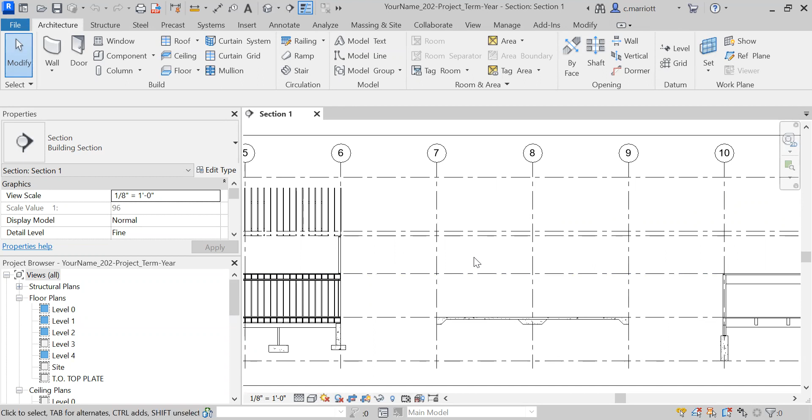In this video, we're going to be working on the third structure, the one that is between column lines 7 and 9. We have here a slab on grade, and the structure that we're going to be adding to the top of this slab is going to be made out of light gauge metal framing. So many of the concepts are the same as with the wood frame construction, but there are some really important and key differences in the two types of construction. So we'll be talking about that as we begin to build this structure.

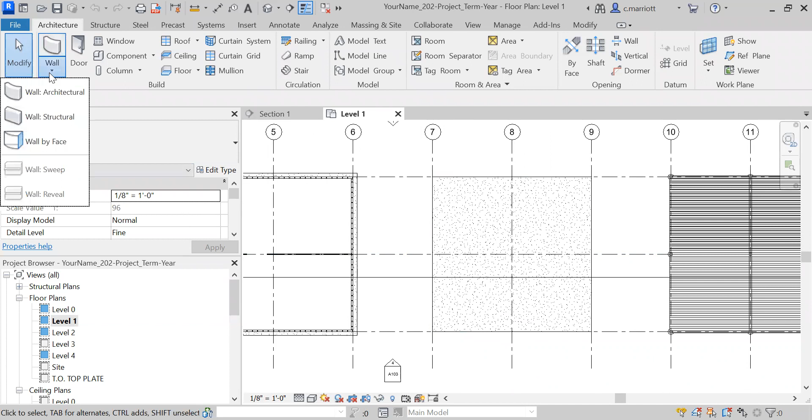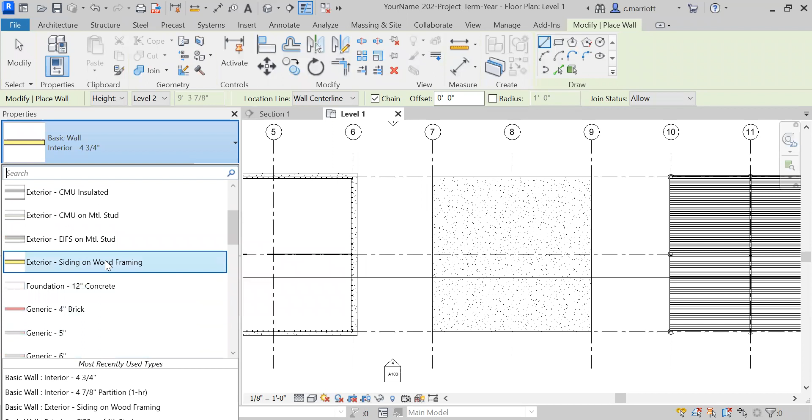Okay, to start off with, we'll be going to level 1 to begin adding some walls. We'll add the walls on all 4 sides here. And what I'm going to do is go to Architecture, to the Wall, pull down here, and I'm going to look for a possible wall to use as a basis for this one. So just scrolling up and looking what I have: brick, CMU, EIFS, siding on wood framing. We're going to be making lots of changes to this. I'm just going to go ahead and select this basic one here for siding on wood framing.

And then I'm going to click on Edit Type. And I'm going to duplicate it. And this one will be called siding on metal framing. And I'm going to click on OK. Then I'm going to click on the Edit button here, and I'll begin adding some components to this wall assembly.

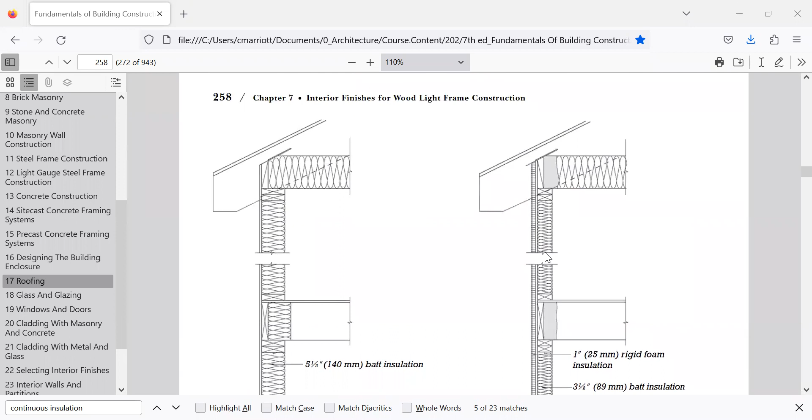Now, going to your textbook, this is the chapter that's on wood light frame construction. So as you know, we're doing this one out of light gauge metal, but there's some concepts here that still apply. So I've got 2 wall assemblies here. On the left side, we have 2x6 studs with batt insulation. And on the right side, we have 2x4 studs with continuous insulation and batts. So the continuous insulation is on the exterior side of the wall. We have the 2x4s and then batts within them.

We're going to use a similar concept in the detailing of this light gauge metal framed wall. We'll have continuous insulation on the exterior, and we'll have batts. We won't include batts actually in this particular wall. We'll include them in the ceiling assembly. We'll leave these open, and we're just going to rely on this continuous insulation to provide for us the insulation that we need. Again, instead of being wood framed, these walls will be framed out of metal.

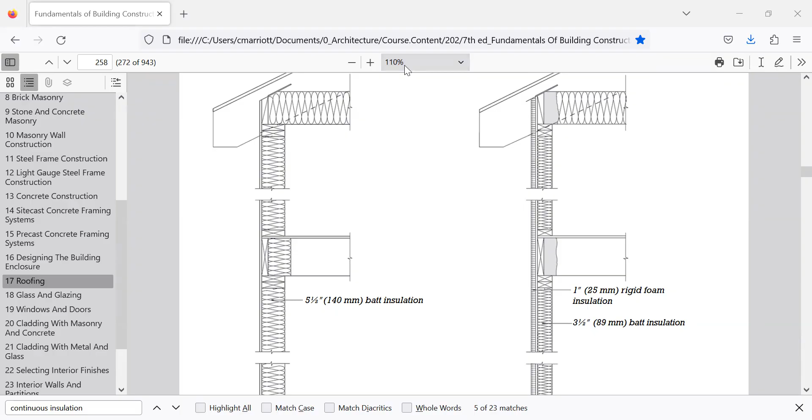Additionally, we're going to be applying some concepts of drained cladding or rain screen cladding, which basically means that there's an air gap behind the siding that permits moisture to drop to the bottom of the wall assembly. So we'll have this insulation. This detail shows something else, but we'll have these layers of rigid insulation that run continuously. And then we'll use some furring strips, and then the siding will be attached to it.

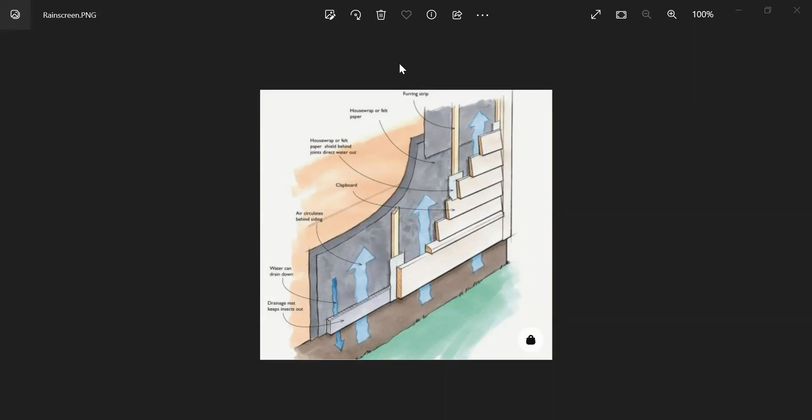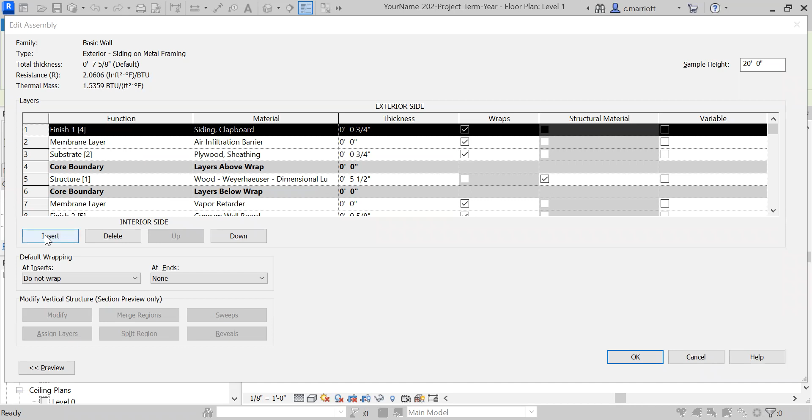So back in our wall assembly, here we have the siding or clapboard. 3/4 of an inch is fine. Air infiltration barrier, the plywood sheathing, and then we get into the core. So we're going to need to add some layers here. I'm going to click on Insert. And the first layer I'm going to add, put it on top of the finish layer. I'm going to move it down.

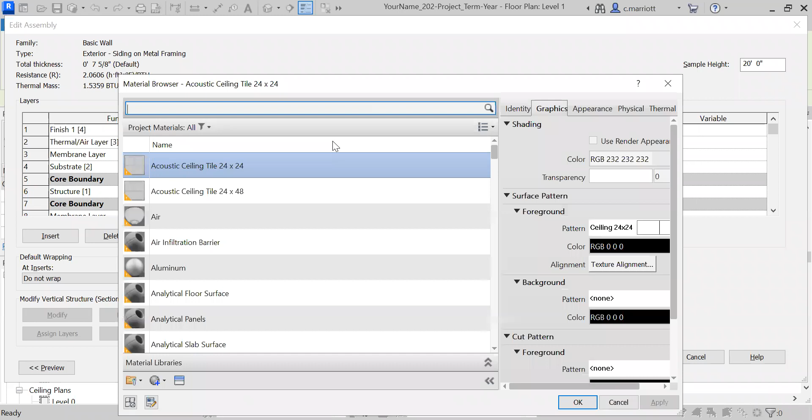This one is going to be, we'll call it a thermal air layer. And we just need some material to serve in this space. I'm going to call it dimensional lumber, even though it's just 3/4 inch furring. And I'll give it a thickness also of 3/4 of an inch. So that's going to be the thickness of that air gap in back.

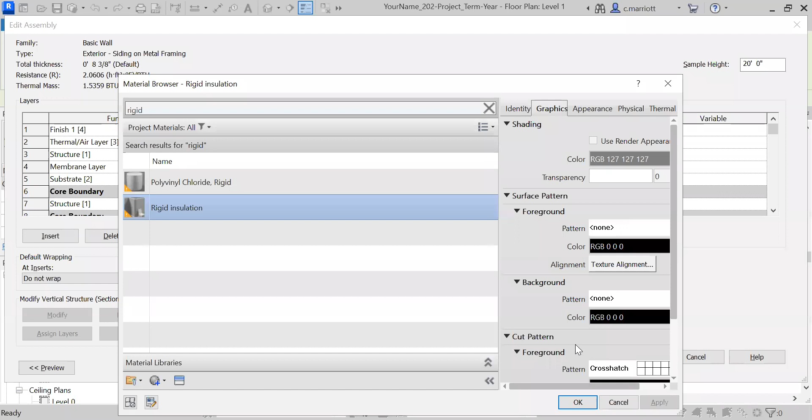And then I'll go ahead and insert another layer. And that one is going to be below the furring. This is going to be a layer of, I'm going to click on the materials here. Let's go back and I'll show you that. Click on the 3 dots, the ellipsis, rigid insulation. And say, okay. Now for the thickness of this, and we'll make this a thermal air layer as well. We're going to go with 3 inches of rigid insulation.

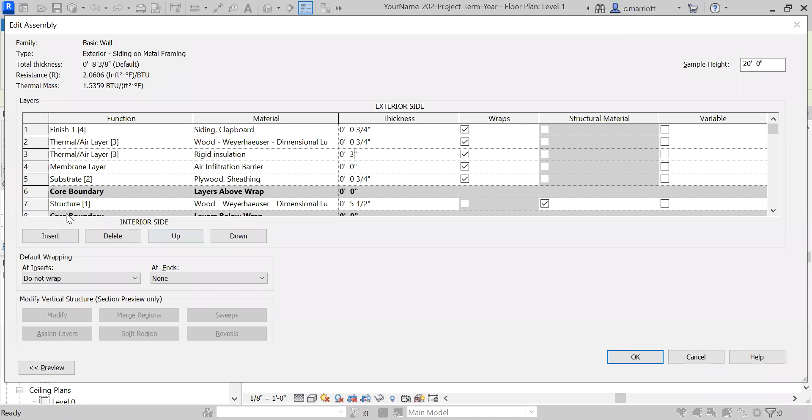Now, the rigid insulation, we're looking to get at the very minimum an R value of 15 from our wall. Of course, you can always add some batts when we get down here to the structure portion of the wall, but we'll have 3 inches of rigid insulation on the exterior. And below that, we'll have the membrane layer and the substrate. So you don't need to make any changes to that.

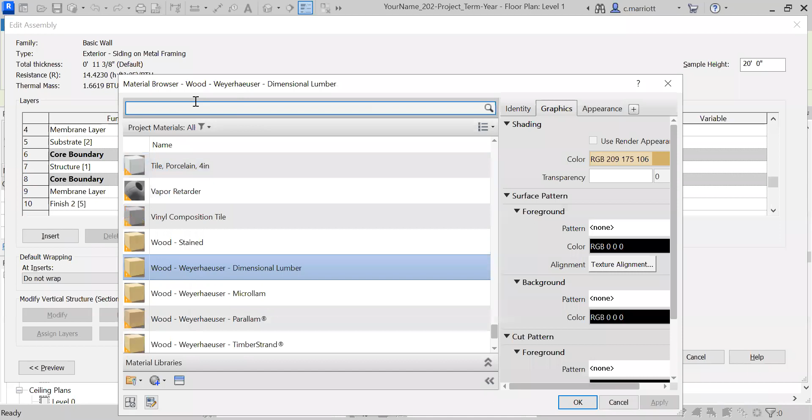Okay, so this wall was based on a wood framed wall. We are going to look up metal stud layer. And we'll click on OK. Now it was already set to a dimensional lumber, 5.5 inches. We're actually going to make our wall out of the equivalent of 2x4s. And for metal studs, the actual dimension would be 3.625 or 3 5/8. Again, this is the equivalent of a 2x4 wall if it were framed in wood.

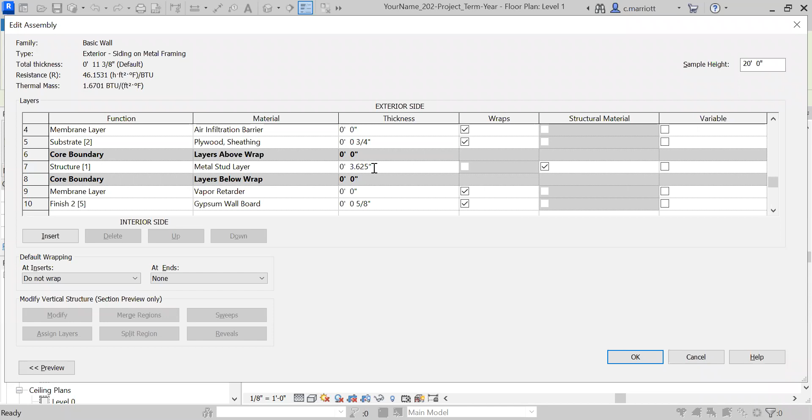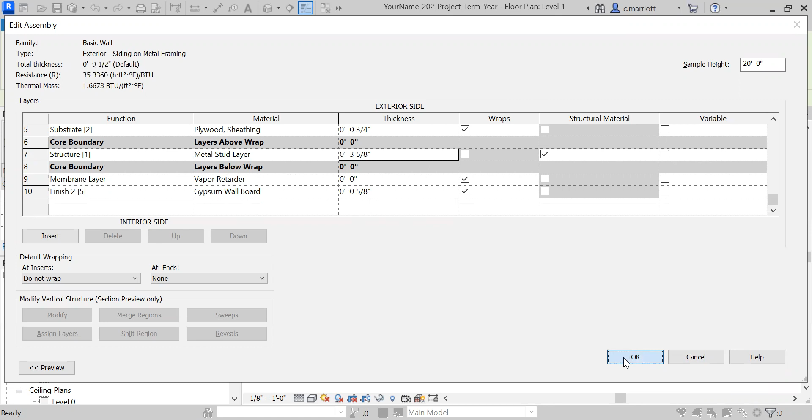Okay, now going down here, we have a vapor retarder, and we'll leave that as is, and a layer of gypsum wallboard that is 5/8 inch, and we'll keep it like that. And I'm going to click on OK. And apply and OK. All right, now I'm ready to place my wall.

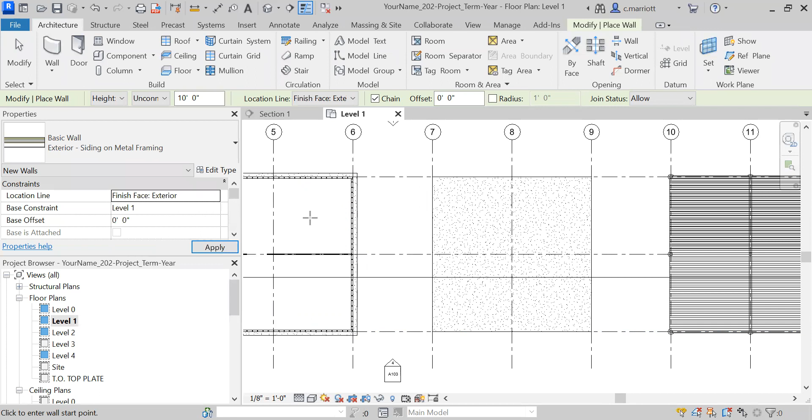I'm going to go to the architecture tab, and I'm going to leave it unconnected. It says 20 feet here. Maybe I'll drop this to 10 feet just for the time being. We'll be changing that shortly. Core face exterior. I'm going to align this wall with the face of my edge of slab here. So we're going to change this. Finished face exterior is what I want that to be. And now I'll go ahead, and it's the right wall, exterior siding on metal framing. I'm going to go around here and add that wall type.

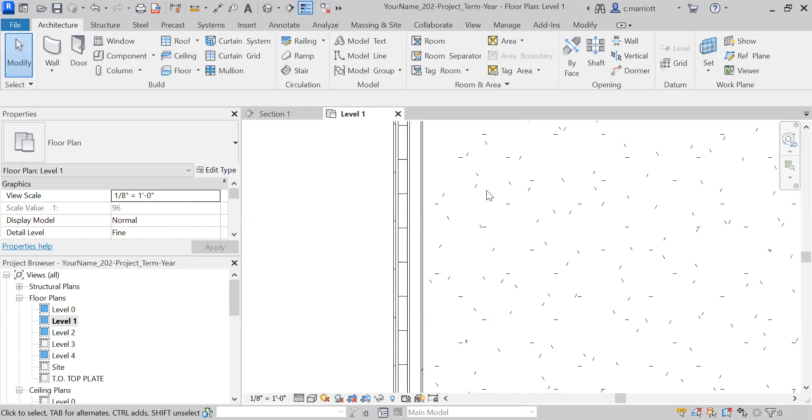Zoom in a little closer. If you haven't already, you can click on the thin line so that you can see the detail. So we'll come in a little closer. I have my clapboard layer, my furring layer. I've got this 3 inches of rigid insulation. I've got a sheathing layer. I've got my metal studs, and then I've got my gypsum wallboard on the interior side. So it's a pretty thick wall.

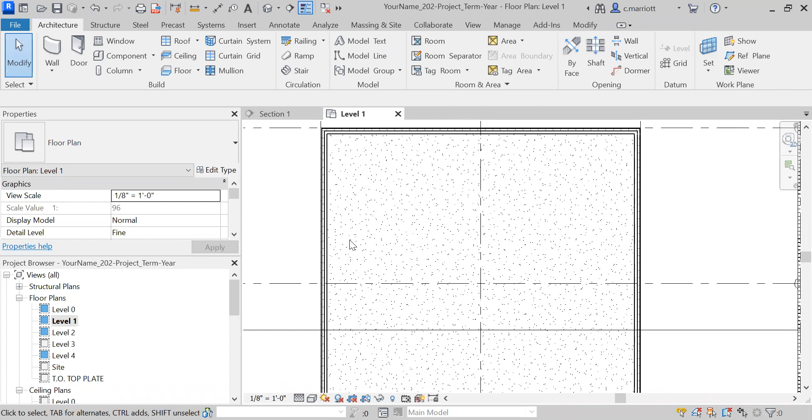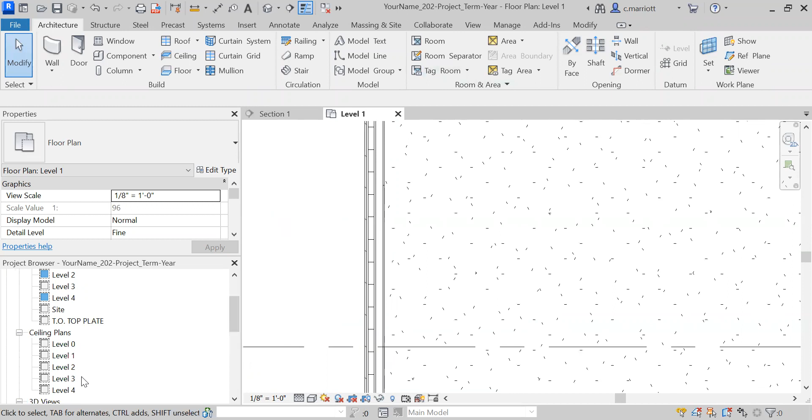But it does handle that issue of the thermal bridge presented by the metal framing. So I'm basically putting all of my insulation on the outside of the metal framing, so that's not an issue. And again, one could always add more batts in between, and it will improve the R value of the wall assembly as a whole. So let's go ahead and take a look at section number 1. You can see these are only coming up 10 feet. And take a look at the detail close to the edge of the slab.

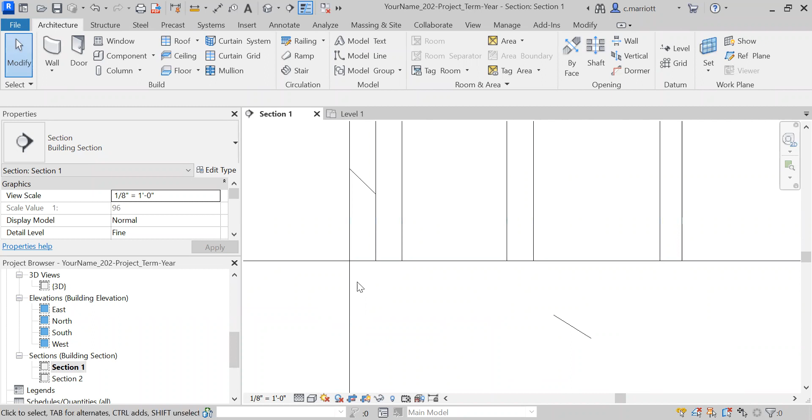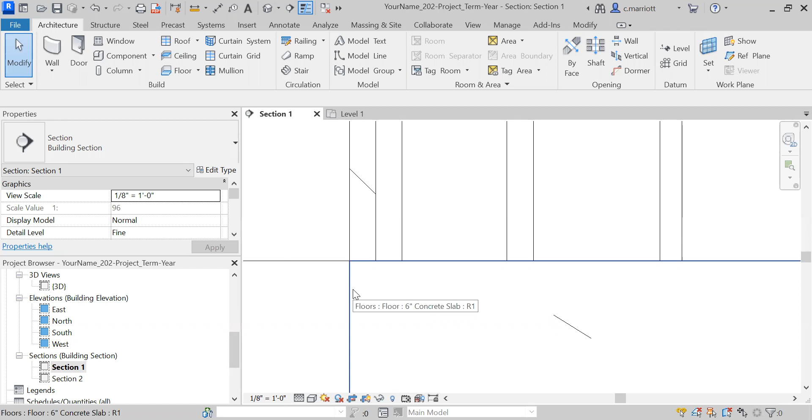Now, when I placed the walls, I aligned them with the face of the concrete slab here. And as I was describing with this assembly, this is an airspace in here that wants to drain out. Now, I can put some flashing at the bottom and turn it out and have it direct the water to the outside, but it might be a better detail to just let this air gap at the bottom be on the left side here of the slab so that it doesn't have to basically make a turn.

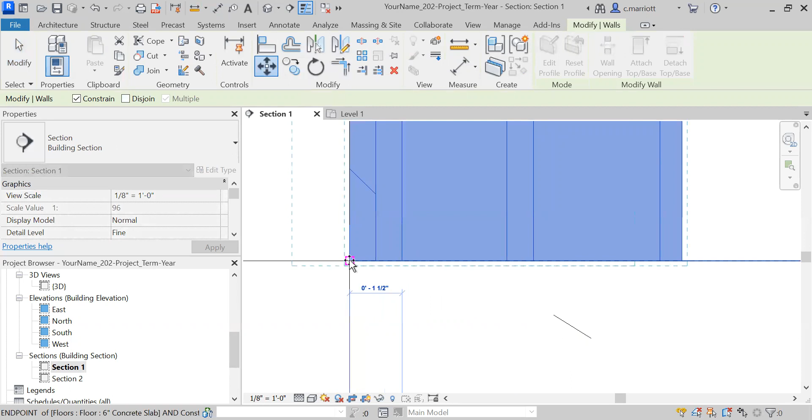So what I'm going to do here first is measure the distance here. So I've got 2 layers of 3/4, so that should be 1.5 inches. I'm going to take that wall and I'm going to move it from here to here. Right, so now there'll be a membrane that's on top of the insulation, but the water, if it's draining out, will go directly out. Okay, and I need to go around all 4 sides of my structure to make that change, 1.5 inches. Okay, and again, you're looking for an alignment of the insulation.

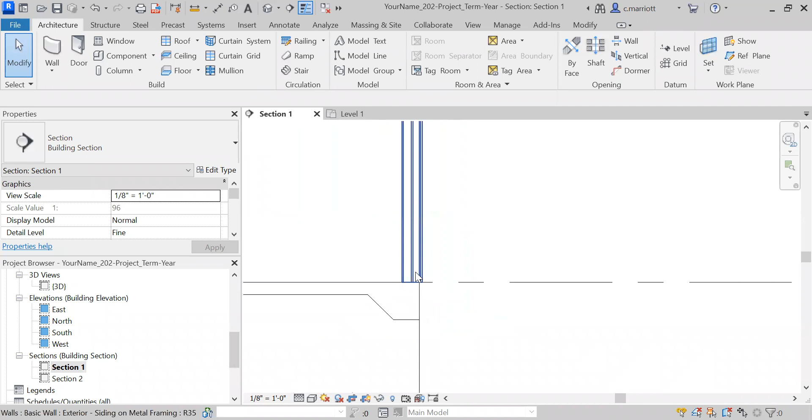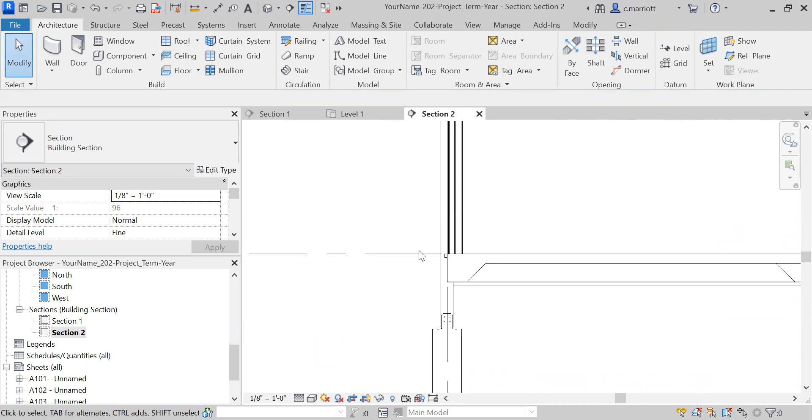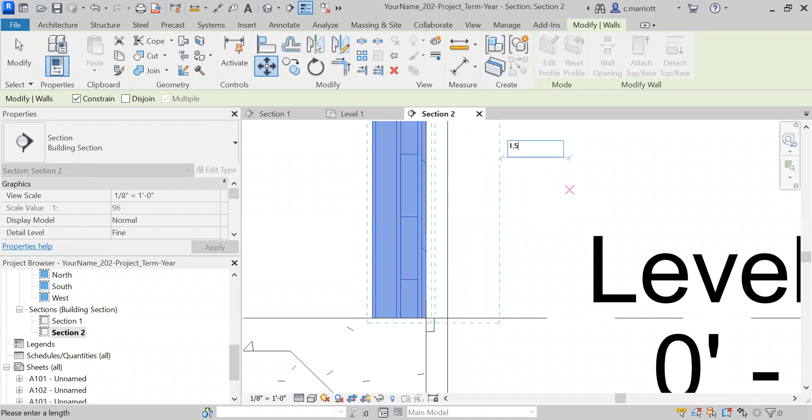And I'll go to section 2. Okay, it looks like I'm gonna have to move section 2. Let's go to level 1 and shift that section marker over to the one I'm working on. Go back to section 2. All right, I can see some of the stuff in the structure beyond. That's okay. I'm going to move this one over 1.5 inches. And this one I will also move over 1.5. Okay. Let's take a look at this in 3D. Okay, so there we have the beginnings of our wall.